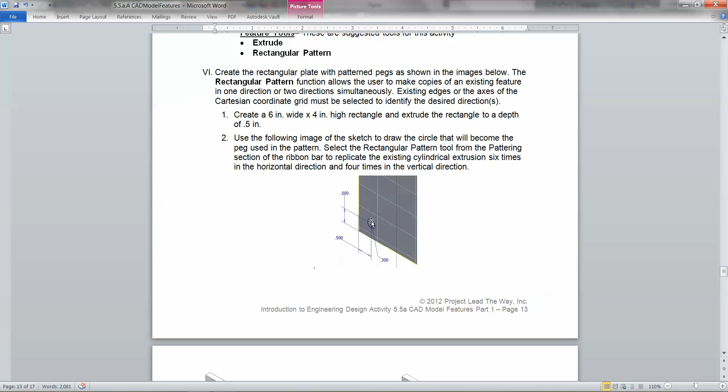So the next part is a sketch on that. That's a 0.30 circle that's 1/2 inch from either side. So that's where I'm going to start here with a new sketch on here down in the corner. A 0.3 inch circle, and then I'm going to dimension that from the sides to the center at 0.5 inches. And we're going to finish the sketch on that one.

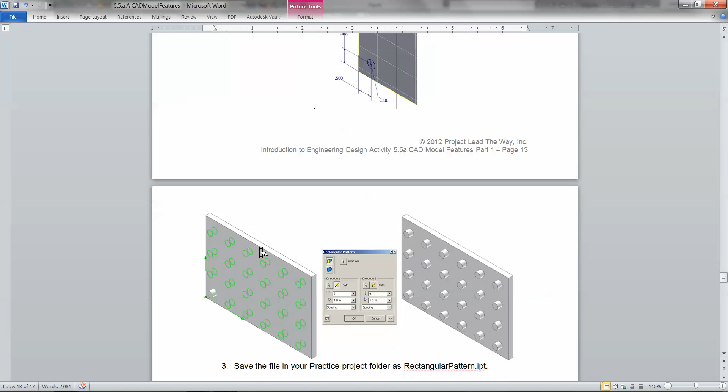Now that part is going to be extruded out, and that extrusion is going to be this peg that's going to go 6 times in the long direction and 4 times in the short direction. That peg's coming out. I'm going to make that extrusion 1/2 inch out as well before we do our rectangular pattern. And we're also going to apply a chamfer to that. So we're going to do that now.

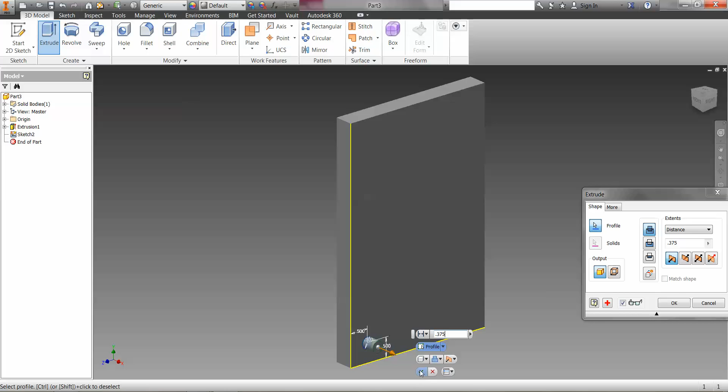So we're going to extrude that bit out. I'm going to go, well, let's go 0.375. That looks better there. And we need to put a chamfer on that. So under fillet is chamfer. And select that size around there.

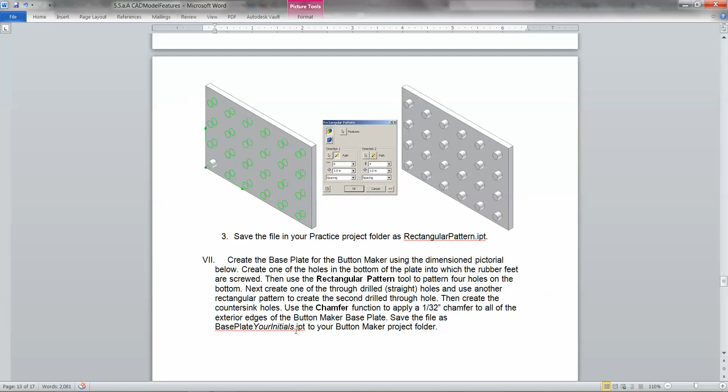And that amount is 1/32 of an inch. So that's not a decimal, but that's okay. We can put that in nonetheless. We just simply type that in as a fraction. 1 divided by 32, and check that. Now we've got what we're going to make our rectangular pattern from.

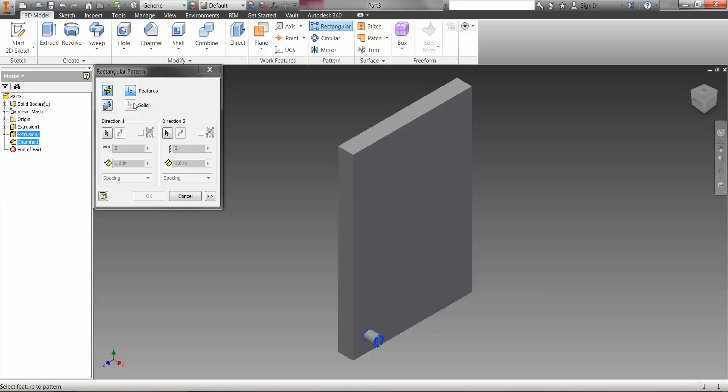So looking at that, we'll use the rectangular pattern, and the first thing we do is to select the feature. So we select the extrusion and the chamfer. You have to select both if you want to get that on all of the pegs. After we select the feature, we're going to select a direction. Now the direction, we select the edge of one of our shapes, and it starts to make our peg.

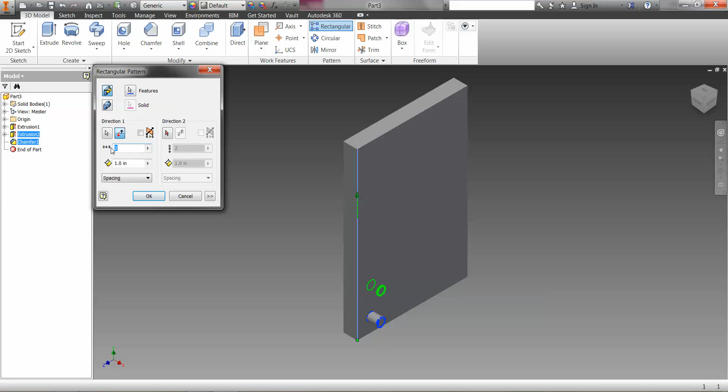You can see it's going off of there, so we need to switch the direction. So in direction 1 here, flip it the other direction. It may be fine for you, but that's what we need. And we need 6 of those going across. It's already set for a 1-inch spacing, which fits them all on there just fine.

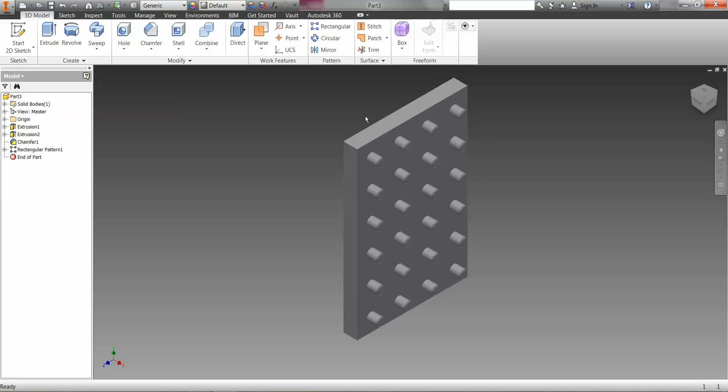Now we switch to direction 2, switch the side, so we're going right and left across this. Flip that direction, and there's going to be 4 of those. Once we've created that, we click OK, and we've got our pegboard. So it's a simple little one, and you can save that. And this is going to be called rectangular pattern. So we have the rectangular pattern saved in our model features.